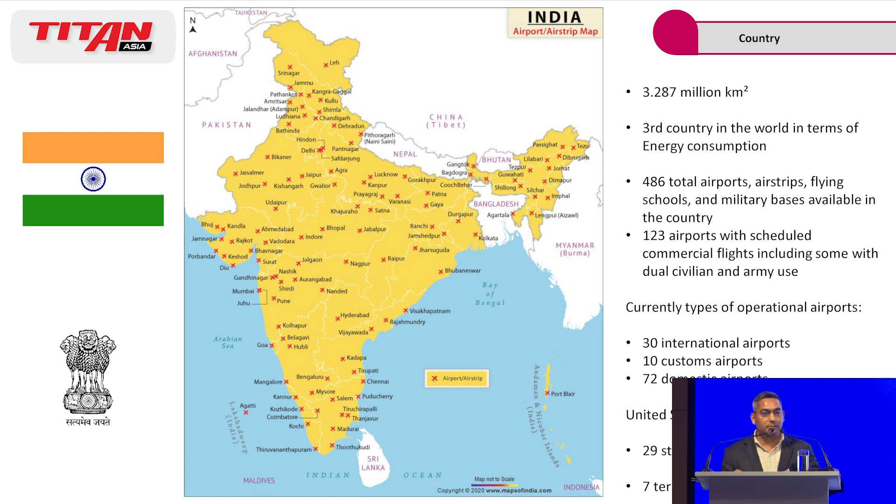Again, some general information about India: it's the 5th economy in terms of GDP. India is politically stable, a pro-business government. You see all the developments and initiatives taken by the Indian government, especially for the aviation industry. Some facts: one-fifth of the world's young population are Indians who are less than 25 years old. It represents not only a market but also manpower. It's the second largest English-speaking population in the world, a huge consumption market. All the indicators are green. Post-pandemic we are growing, and there's lots to come and lots to be achieved.

So yes, again, the market drivers: we know the projected air traffic is expected to exceed 1.1 billion, a 4-fold increase by 2040 of airlines in India. Airport infrastructure will see huge investments from abroad - we have seen some examples of new airports, with 40-50 billion expected in the next two decades. Many airports are getting privatized under the initiative of the Government of India, and the number of airports is set to double by 2040. So India will already be, before 2030, the third largest domestic market.

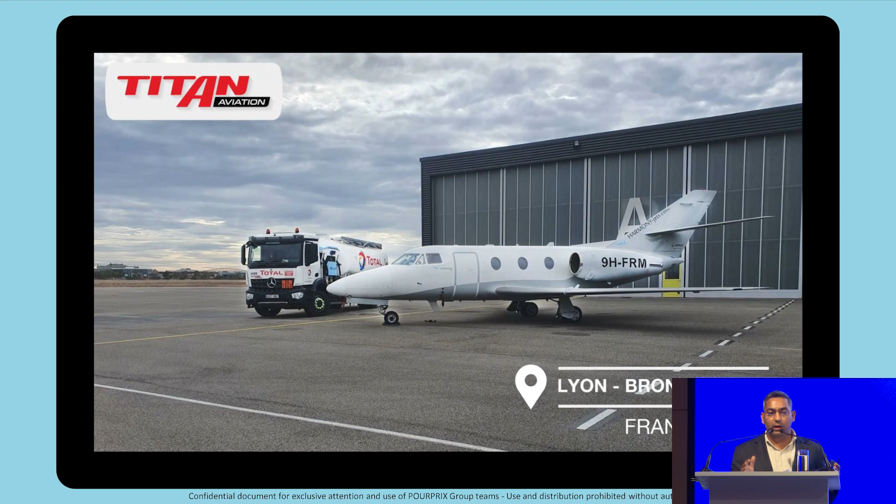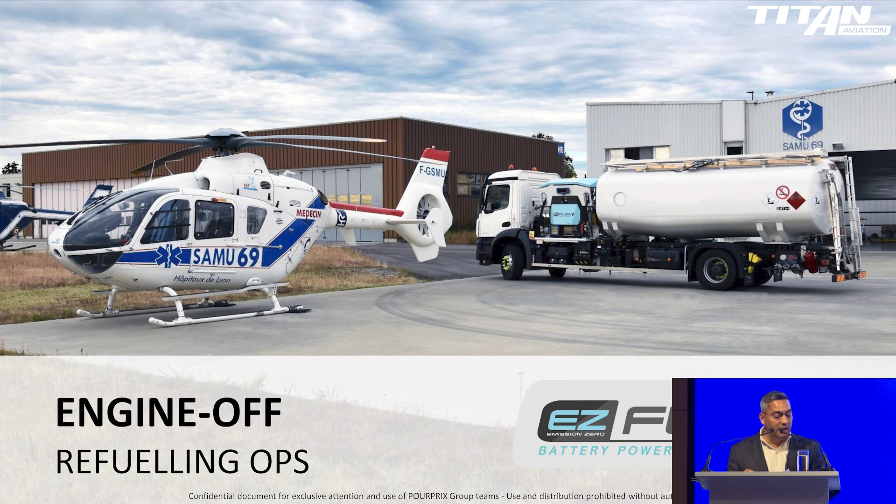So coming back to what solutions our company in France has developed - these have already been supplied to various clients globally. The first solution is the hybrid solution. We have a standard chassis on which we provide fail-safe batteries with a lifespan of a minimum of 8 years, providing a sustainable refurbishment solution. It's a low investment on existing aircraft refuelers - we can fit this kit. These are fail-safe batteries, and our parent company has already supplied this in France and Europe. There are many examples of hybrid solutions we have already supplied. We call it EZ Flow, the hybrid solution.

The second solution is the EZ Control solution. For the hybrid, with a full electric solution there are no noises. In terms of safety it's very good for the operators - they have a very good environment to work in with low risk.

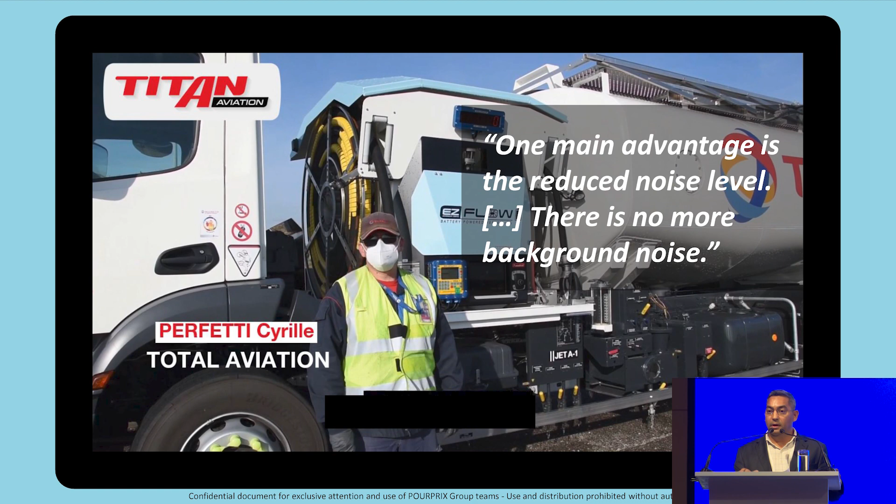The second solution we have is EZ Control, which is digitalized refueling. This is just a tablet on the control panel which manages all the refueling information, and for the operator it is very intuitive and simple to use. This EZ Control solution has already been implemented and supplied to Total Energies and various other clients.

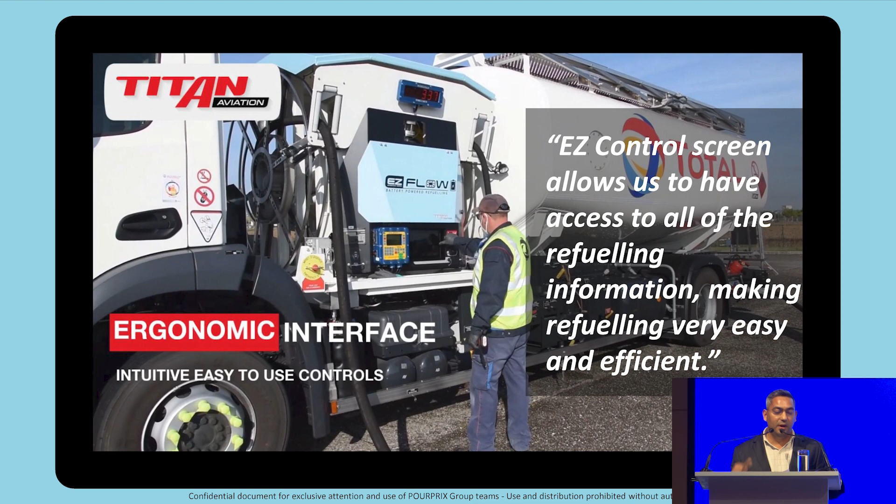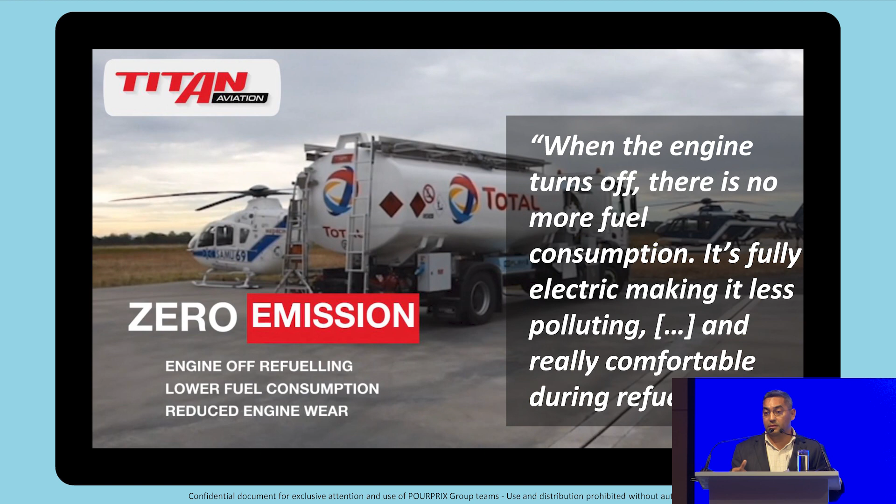So of course there is no fuel consumption when the engine is off, and we are creating a better environment, and it is really comfortable and safe for the operators for refueling, during refueling as well. So Titan Aviation

is committed to improving air quality at airports with a complete range of zero-emission refueling vehicles and equipment. This vehicle, last year in May, refueled the first flight of SAF from Total Energies on an Air France long-haul flight from Paris to Montreal. It's a full electric vehicle, which has an electric chassis as well as an electric refueling module, which we discussed before.

So on this, the battery pack on a single charge can achieve 100,000 liters in a single charge. Should an into-plane company require more than this on a single charge, we can put 2 battery packs. That is already done and already supplied.

For the duty cycles, some of this data has already been presented in Geneva at IATA, I'll go quickly through it. But we are reducing, on average, with our duty calculations done for all these refuelers, around 180,000 kilograms of CO2 per year per electric aviation refueler.

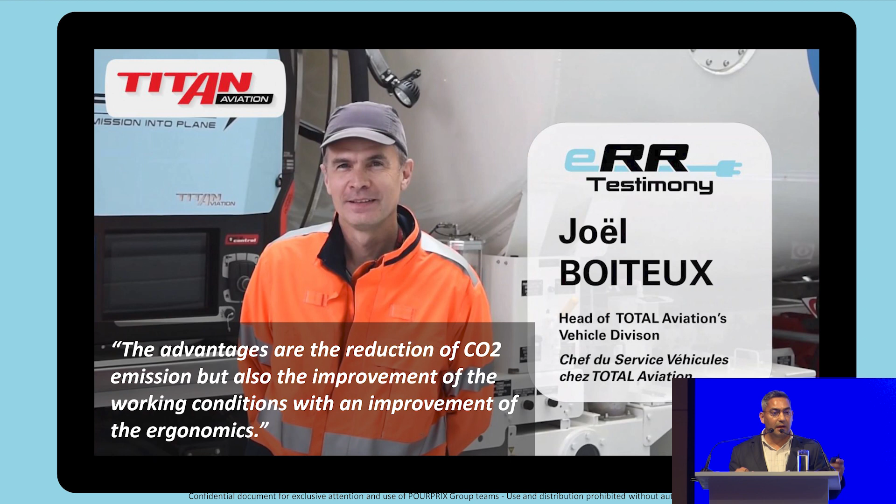Our parent company anticipated and developed the complete range of electric refueling solutions. All airports have their targets to go carbon neutral, and we'll see some examples of what's happening in India after.

Our engineering team has built a tool to calculate the duty cycles for each client, so they can use it for any airport, for any requirement as per their needs, which will help them determine the battery pack size they need for their operations for each airport equipment. We have standardized modules also, doing low flow, mid flow, and high flow rate design and dimensions, which can work for long haul or short haul flights.

Again, with this new vehicle, we are achieving airport decarbonization. Our clients are achieving that, our end users are achieving that. It's again very good for the operators and the environment in their working conditions.

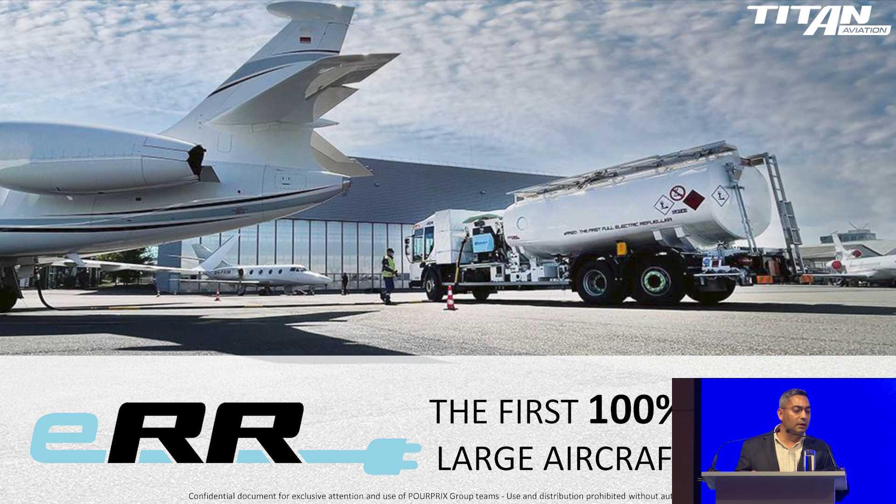Okay, so can you? There is a video on some solutions what we are doing.

Small solution, indigenous in India. India is the sixth largest air transport market in the world today. The Indian aviation industry has experienced remarkable success, displaying an impressive growth in domestic air travel.

We are proud to be a part of Indian aviation's growth story. As per current trends, India will be the third largest domestic air transport market in the world by 2030, and it has already begun its recovery from the setbacks caused by the pandemic. This rise in demand for air travel has necessitated supportive government policies.

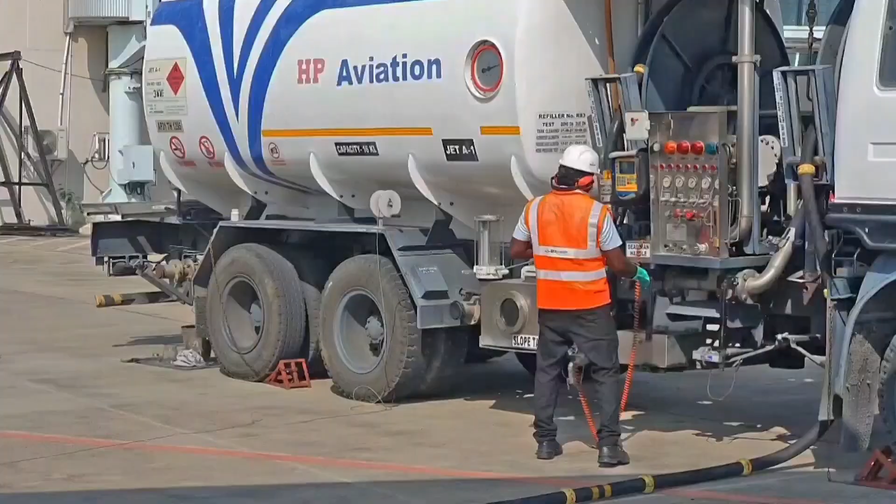A pioneer in the field, today HP Aviation provides aircraft refueling services to domestic and international customers at various important airports across India.

We understand the need of the hour.

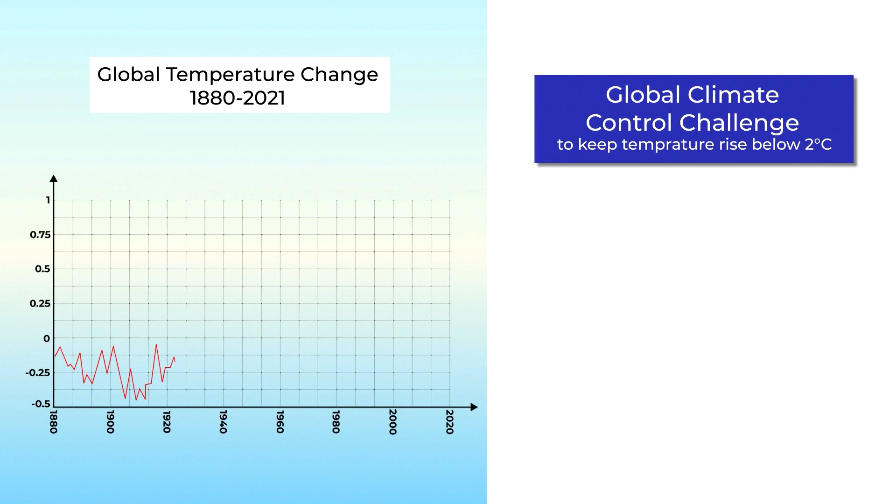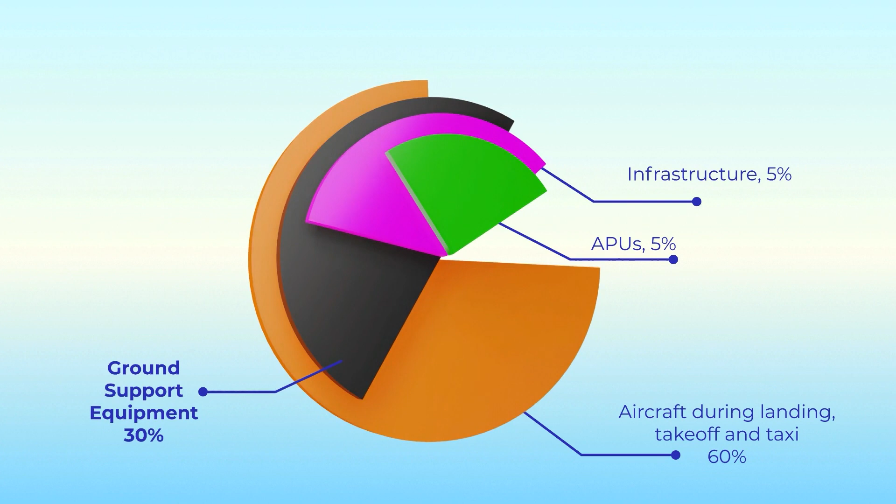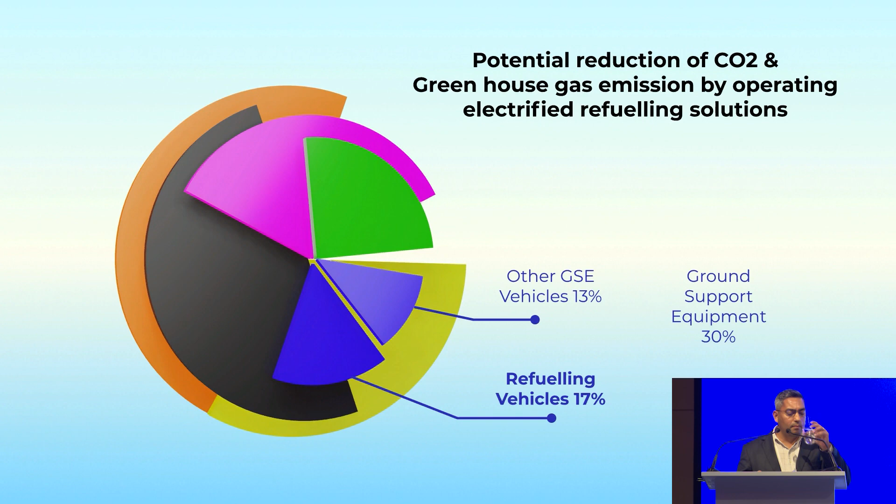In India, there are approximately 1,000 units of refueling equipment managed by into-plane refueling companies. We understand the challenges that we all face today due to climate change. The need of the hour is to move forward. We make swift technological advancements and we lead the way. Presenting India's first ever autonomous solar-powered refueling solution for our various growing and upcoming RCS airports and smaller airports.

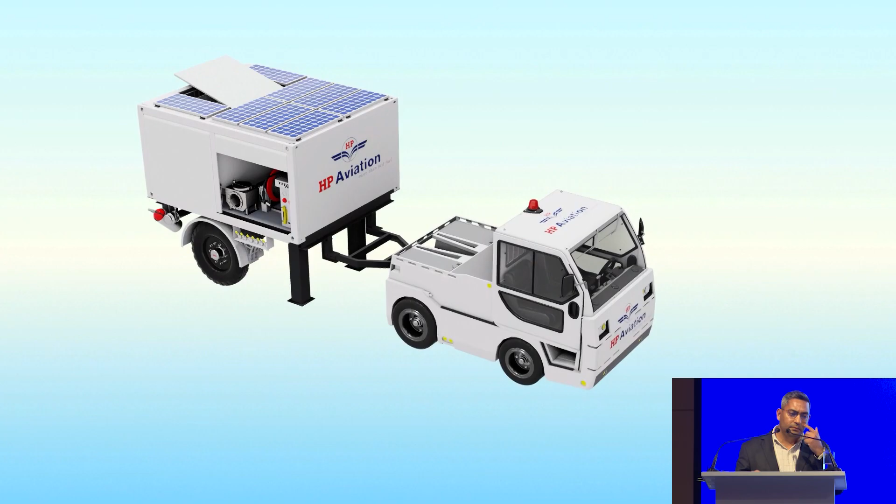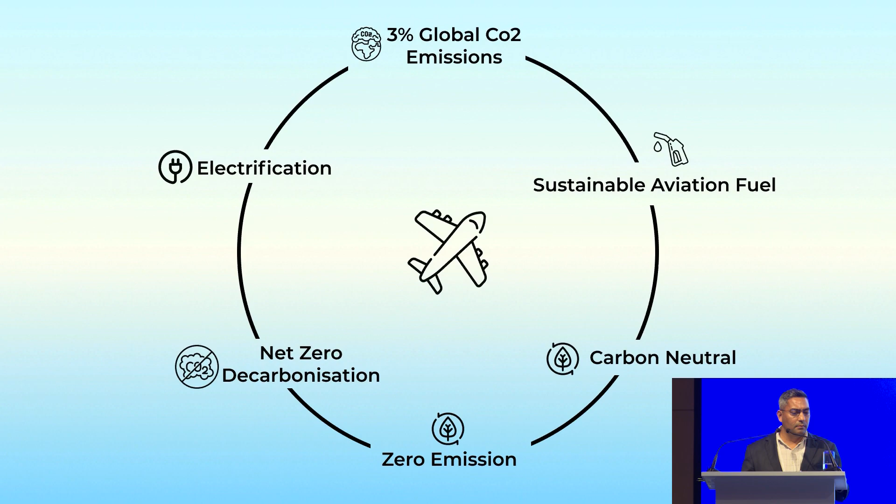Powered by solar energy, this refueling cart is specifically designed to efficiently fuel various aircrafts and helicopters at RCS airports and smaller airports, fueling our nation's way forward. With the help of these eco-friendly refueling equipment solutions, we create use of sustainable energy and can reduce CO2 emissions by up to 180,000 kilos per unit per year. We lead the way forward with our clean energy solutions.

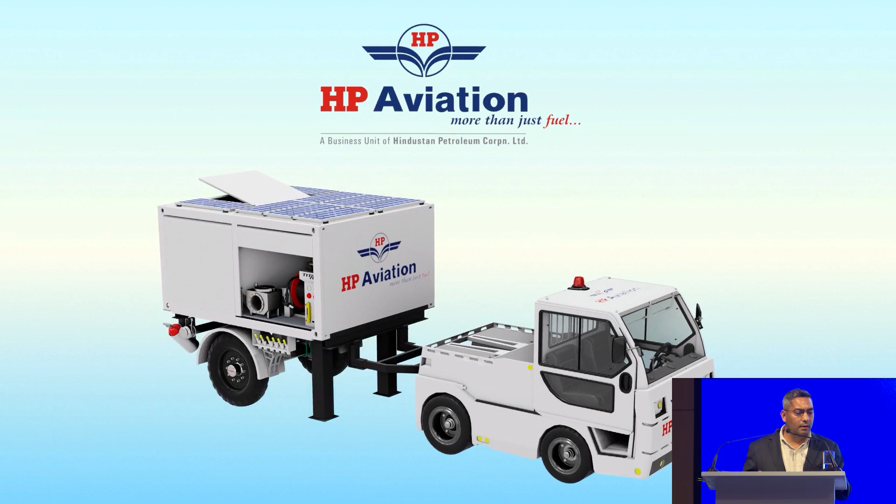What is happening in India at the airports? The Airports Authority of India, as per our climate change initiative, has already installed solar farms at 44 existing airports, out of which 22 airports are working 100% on renewable energy.

This data was discussed yesterday also, and our Honorable Minister of Petroleum and Natural Gas gave the example of Bangalore. So we tried to give a solution for these small domestic airports, RCS airports. I would like to thank HPCL Aviation and the aviation team, especially HPCL Executive Director Mr. Kanuru Srinivas, for initiating this green solar refueling cart project and giving us the opportunity to develop it.

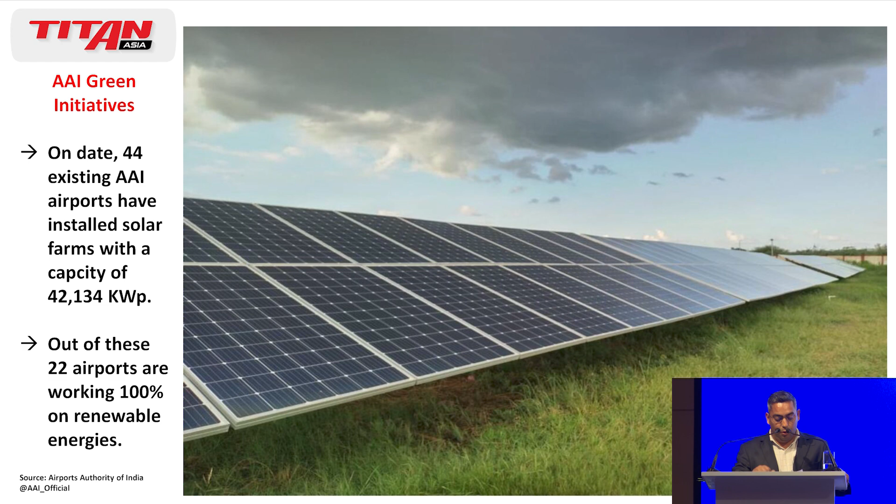In India, the solar resource we have, as per data from the Solar Energy Center and National Renewable Energy Lab, shows global horizontal irradiance across the total land area of 3.3 million kilometers square. We already have solar horizontal irradiation of 5 to 6 kilowatt hours per meter square per day. For this green solution and harnessing solar energy, this is what we have done.

We have made a prototype of an ultra-compact design for a solar cart with various safety features, including a self-bunded double-wall tank. This provides safety for initial leakage in the primary tank, which can be contained and becomes leak-proof, while also enabling rapid leak detection.

For the solar panels, we use the latest technology available, mono PERC solar panels, which have higher than 21% photovoltaic cell efficiency. Many improvements are coming in this field, and it can be used in combination with other solar technologies like IBC and bifacial.

We have given a charge controller with all the battery parameters, identifying real-time error codes, protection against array short circuit, photovoltaic over voltage, over current, current overload, short circuit, photovoltaic and battery reverse polarity, and in case of over temperature, the heat sink activates at 65 degrees Celsius with complete shut-off at 80 degrees Celsius.

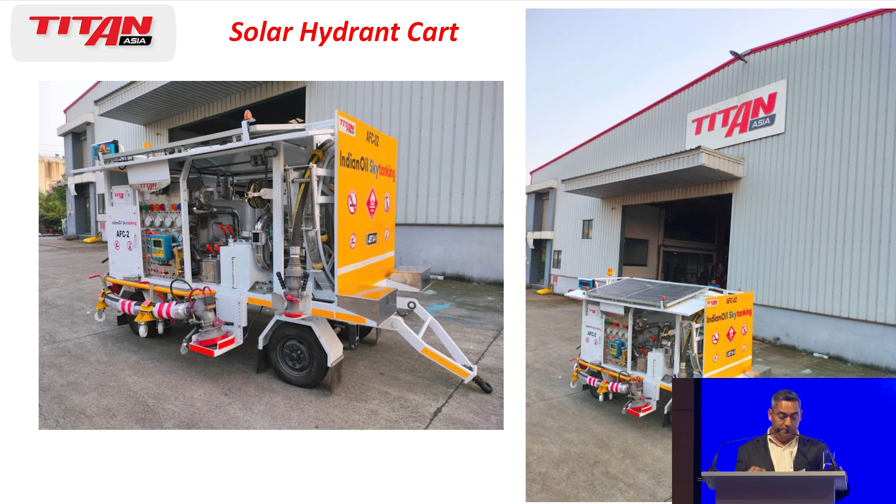Apart from that, we have made solar hydrant carts, which are completely autonomous with filter water separators for our various other clients as well.

One of the other pilot projects which we did at another international airport in India is the fuel management system to improve the response time of the refueler as well as manpower, integration of reports, automate human resources, management of deliveries, and safety information. Main components, of course, a web server to manage fleet operations, to manage all the ground support operations. There is an embedded tablet, interface between operations office and refueling operators.

All information needed to proceed for refueling directly on screen, meter status, states of refueling, differential pressure, temperature, density, automatic tank content gauging, etc. are sent in real time to the operations shift officer.

Of course, we have also added options like RFID badge identification and telematics for GPS positioning, so we can capture all the truck data in real time and give it to the operation as well. So defining restricted areas, following up on assets, manpower, and complete fleet management.

So all the flight data can be entered and imported in the system. Refueling operations are visible on screen. All operators' information stored on a secured server. Reports can be generated, which are important for traceability and quality, improve ground operations, how many number of fuelings, volumes, planning, operator assignment are just some examples.

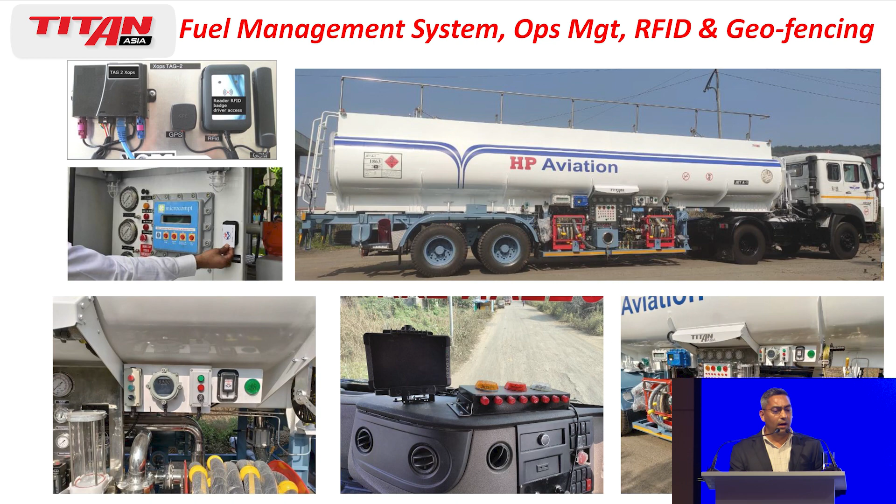To date, we don't have any commercial heavy-duty electric trucks available in India like we have in Europe. And of course, we don't have any resources to make these lithium-ion batteries for the hybrid solution and full electric solutions which I discussed. So we are dependent on foreign countries and foreign suppliers for these battery manufacturers.

Indian government has come up with a policy to make lithium-ion batteries in India under the production subsidy, and they have given it to big players like Tata Chemicals, etc. Of course, then the infrastructure at the airport for charging stations, services, there is no OEM setup for them.